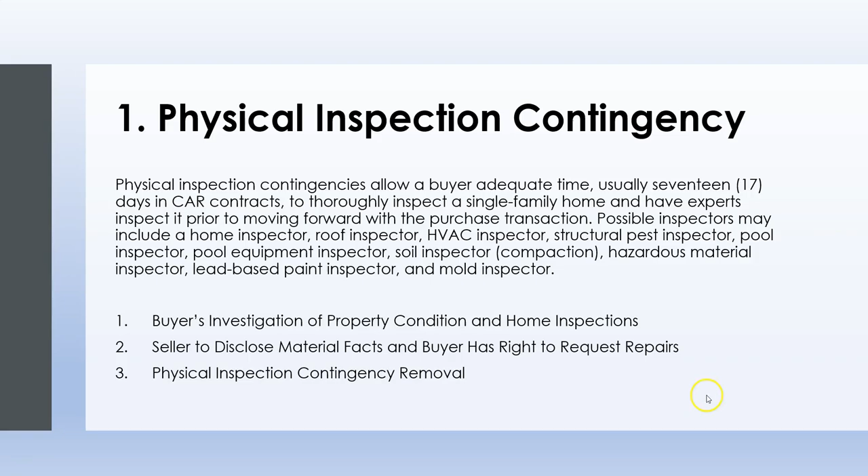And right now we are mostly using active contingency removal, so they would use an actual contingency removal form. So we're going to go into this: construction definitions from the ground up.

Soils report: agent Able notices a crack in a wall and that the doors do not close properly. We cannot say what it's about or what caused it. We can only point out that there is a crack in the wall and that the doors do not close properly, and we should advise them to obtain a soils report because that shows there's something with the soil. We don't know what, but they would want to get an idea of why there's a crack in the wall and that the door is not shutting properly. So soils report, that's what the state likes to ask about.

So that's what we're covering: soil conditions. These are the three soil conditions: expansive, adobe, alkalinity. So these are the three. When you see these three, just know they refer to soil conditions. You don't actually need to know what they are, but that they are soil conditions.

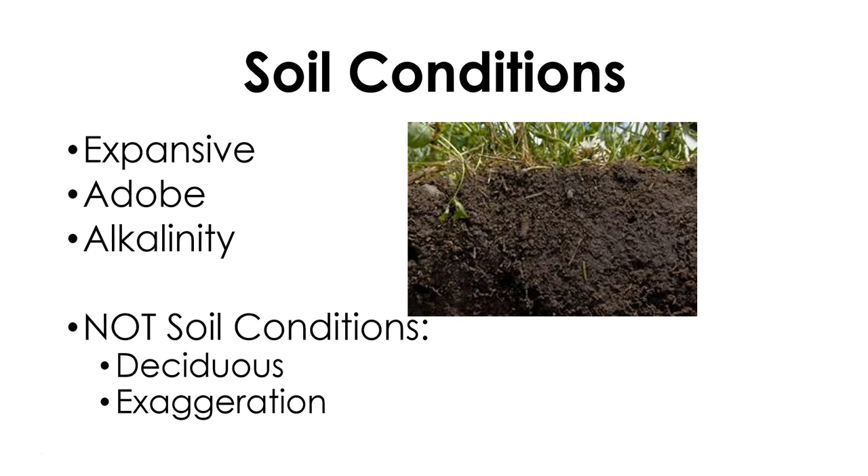Now, if you see deciduous or exaggeration, those are not soil conditions. Deciduous is a type of tree, for instance. So those are not—that's a question that they have out there. You just need to know which ones are soil conditions and which ones are not.

Foundation plan, this is really important. Let me get my pointer here. Let's do a highlighter. Okay, so the footings, these are the things at the bottom of the foundation plan. Now footings can be inside the home as well though, so it doesn't necessarily have to be the exterior of the home. And then you have the sole plate, so that is this part right here, what is the studs and connects to.

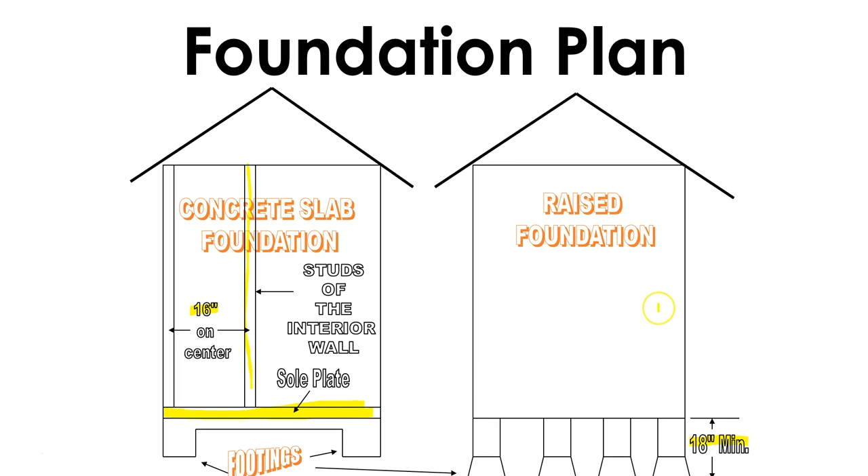And then the studs, these are right here, and they're 16 inches on center. You need to know that—16 inches on center for studs of the interior wall. Now, on the raised foundation, it is an 18-inch minimum. So raised foundations, the crawl space has to be 18-inch minimum, and the footings as well. So that's what you need to know there.

Footing, so when you see footing, it's basically the foundation, so just think of them as synonymous. A footing can be located in the interior of a house, so it doesn't necessarily have to be the exterior of the home. It could be the interior.

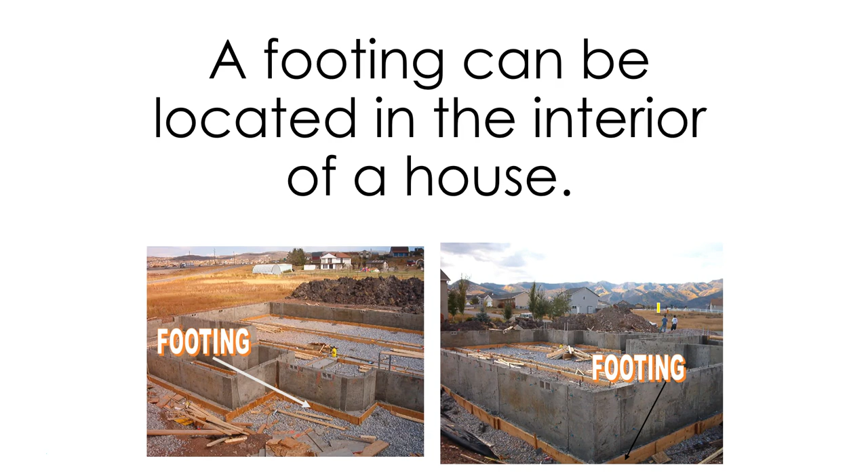Backfill. When they're putting the foundation into the home, they're usually going to excavate some of the soil. What they do is put the soil back where it should be, against the home. That's called backfill. As you can see here, backfill would be in this space right here, and it also makes up for the difference between the home and the ground and soil levels.

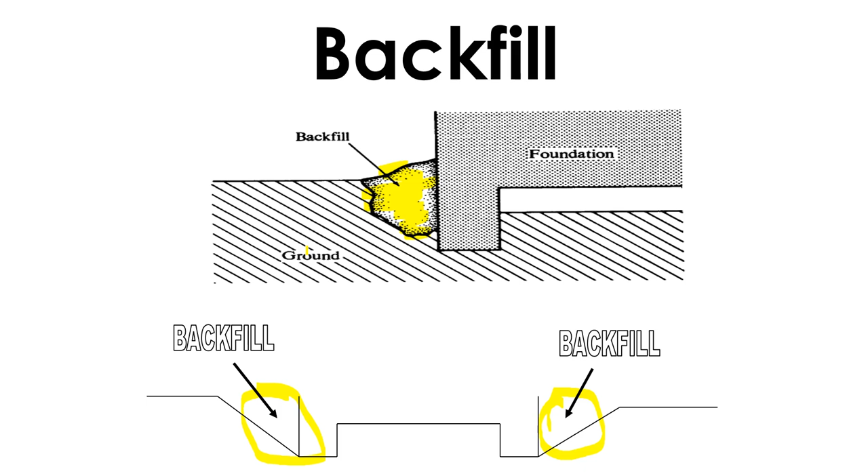Infill. Don't get backfill and infill confused, because infill is an unused area that small commercial developers plan to develop. They look at unused areas, and that's an infill location, and they want to develop that area. So remember, backfill is what we put in next to the foundation, and infill is unused land that small commercial developers plan to develop.

Elevation plan. This shows the exterior view of the building - if you're actually standing and looking at the property, what you're seeing. In new homes, for instance, they'll say there are different elevations to choose from for the same floor plan. It's just what the outside of the house is going to look like - you might have more of a southern look, or a Tuscan or Italian, something like a Mediterranean look. So it's just what it looks like on the outside.

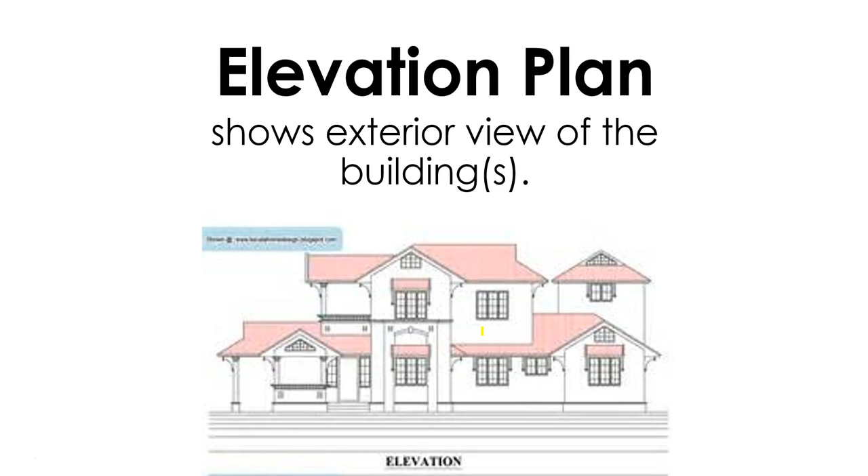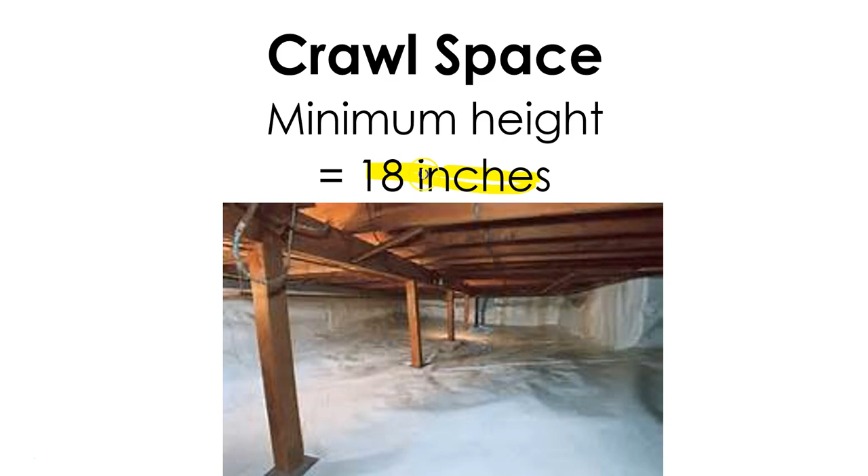Crawl space - remember, minimum height is 18 inches. Studs are 16 inches on center. The crawl space is 18 inches. These are the two numbers you really need to know.

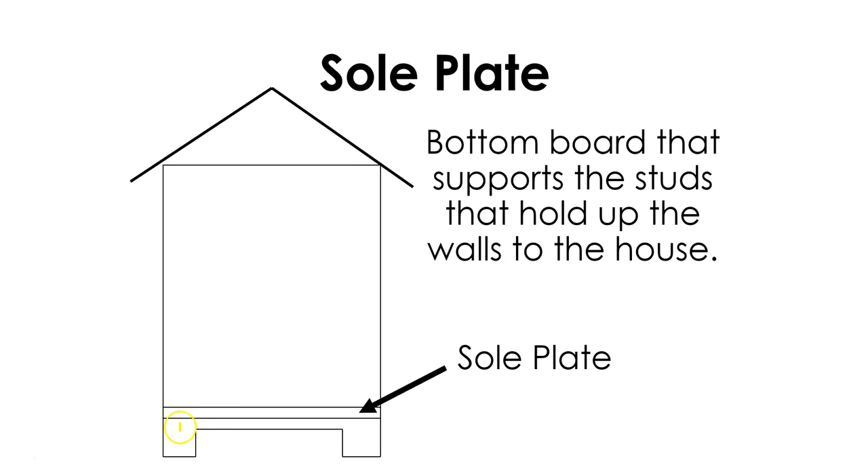Sole plate - it's the bottom board that supports the studs that hold up the walls of the house. Remember where the footing was, where the foundation goes - the sole plate is here, and that holds up the studs, which are here. Remember, 16 inches on center.

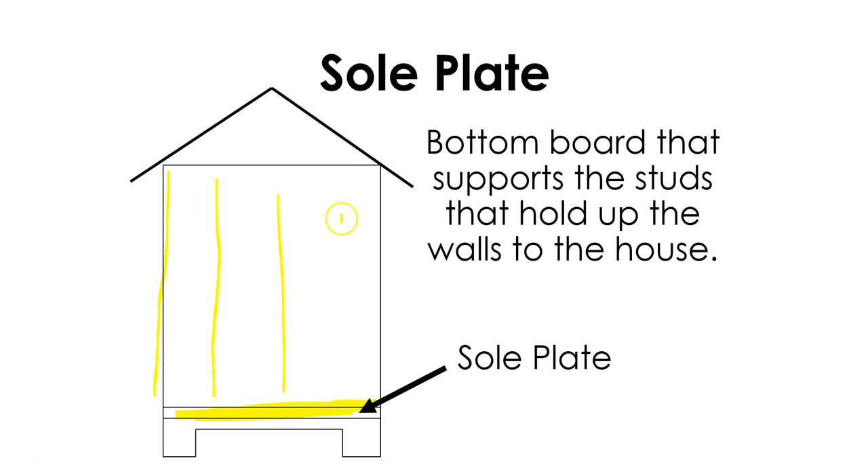Putting it all together - studs, 16 inches on center. They're the boards used to frame a wood frame house. Maximum spacing is 16 inches on center.

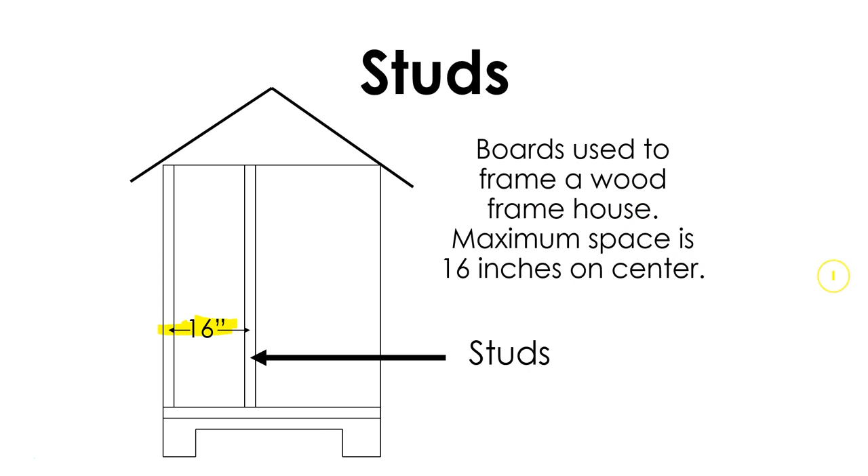One board foot equals 144 cubic inches. You need to know what a board foot is - this is sometimes what people might use to quote lumber, for instance. It's not super common, but we do need to know about it. So 1 board foot equals 144 cubic inches, and this is where you can do the math to figure it out. For instance, a board that is 6 inches by 12 inches by 2 inches is 144 cubic inches and is equal to 1 board foot. So remember, when solving volume...

Let's do the math. We do 6 times 12 times 2, and that equals 144. To make the math easy, you can do 6 times 2 is 12, times 12, which we know is 144. Or you can do 6 times 12, which is 72, times 2 - yeah, that's 144. So that's 1 board foot.

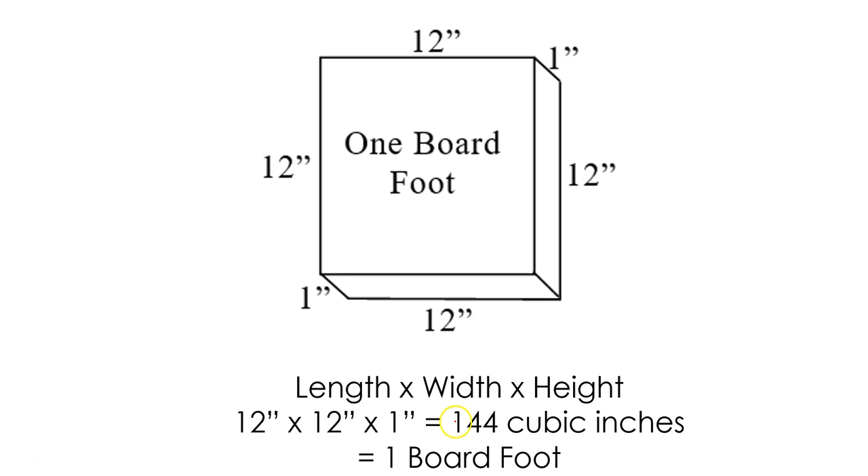Now let's apply this. For instance, if it's 12 inches by 1 inch by 12 inches, that equals 144 cubic inches, which is 1 board foot. So 12 by 12 by 1. Remember, we have to keep track though if it's inches or feet.

So for instance, here's another one. If it was 12 inches by 2 inches by 6 inches, we have 12 inches by 6 inches by 2 inches equals 144 cubic inches. And we know 144 cubic inches is 1 board foot.

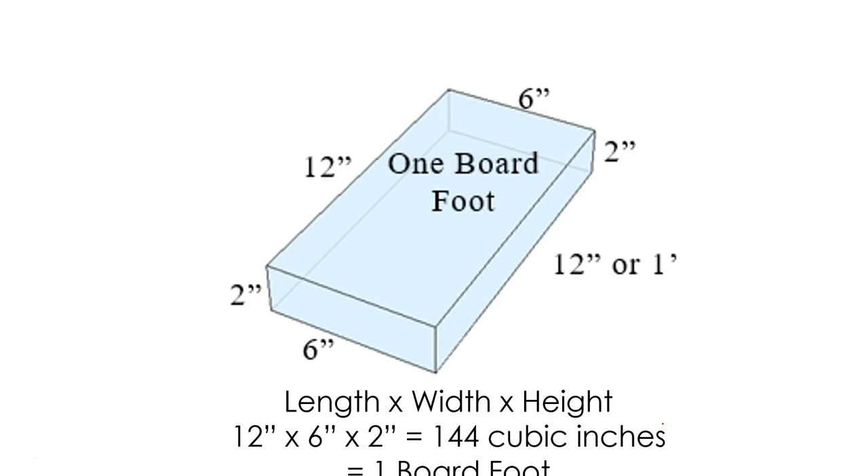Now here's where it gets a little fun, because this one is in feet. So we have 12 feet by 12 inches by 2 inches. What we'd do is find out how many cubic inches it is, divide it by 144 since that's 1 board foot, and we'd know it's 24 board feet. So just keep that in mind. We do the math just like we did here. It's 144 cubic inches, so if we divide 144 by 144, we get 1 board foot.

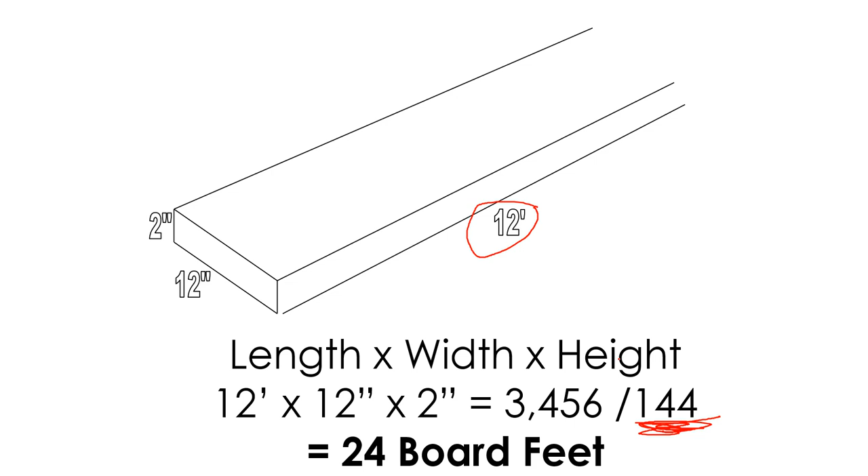However, this one we have 3,456 cubic inches divided by 144 cubic inches, and we get 24 board feet. So some simple math calculations, but it's good to know how to do it.

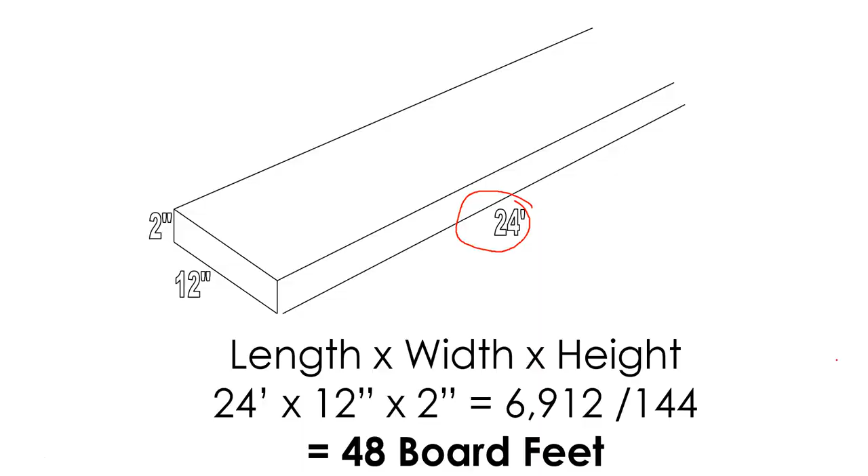We'll apply it one more time. So if it's 24 feet by 12 inches by 2 inches, then we have 6912 divided by 144, so we get 48 board feet. These are important to know to be able to do the calculation. So when you think of board feet, just think of 144 cubic inches, because we're dealing with volume: length times width times height.

Okay, bearing wall. A bearing wall usually remains intact during remodeling, can be an archway, and usually contains stronger structural members. Bearing walls are really important—they keep the house up, and they usually remain because touching them is a pain for structural purposes, but also for permits. So it's really important to remember about the bearing wall. That's really all you got to know for state exam purposes.

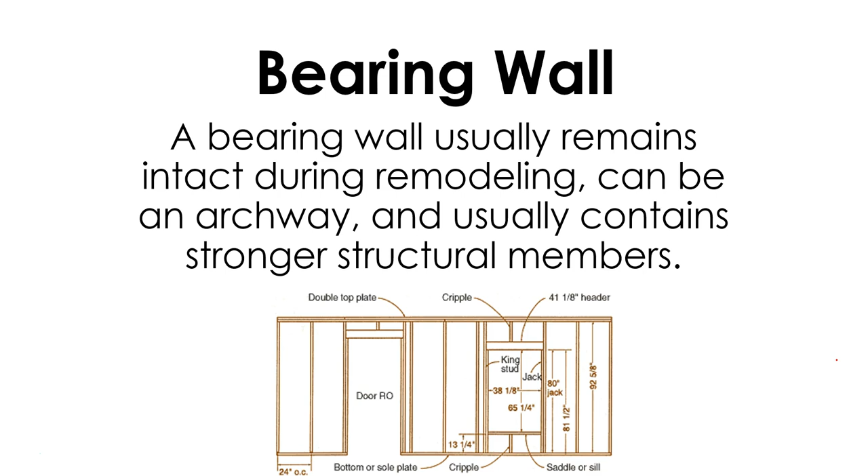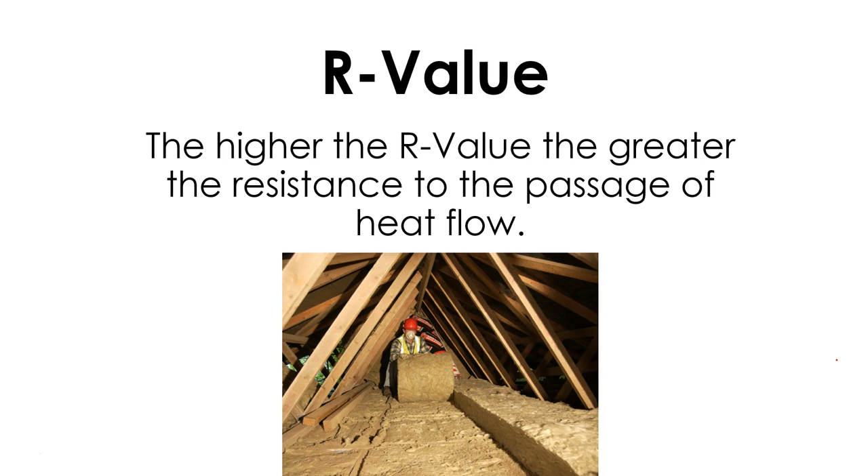So let's move on, R value. The higher the R value, the greater the resistance to the passage of heat flow. So if you have a higher R value on your insulation, you're going to have greater resistance to heat flow—so it's better insulation. Just remember that: higher the R value, the better, because it has greater resistance to the passage of heat flow.

EER, energy efficiency ratio. The higher the ratio, the better the rating. So we want to have energy efficiency, and the higher the ratio, the better it is.

Joist. So we've talked about floor, sole plate, footings, and the studs that are 16 inches on center, but what about the joists? The joists are the parallel wooden members used to support floor and ceiling loads. So it can be in the floor or also in the ceiling—it's important to know the joist could be in the ceiling.

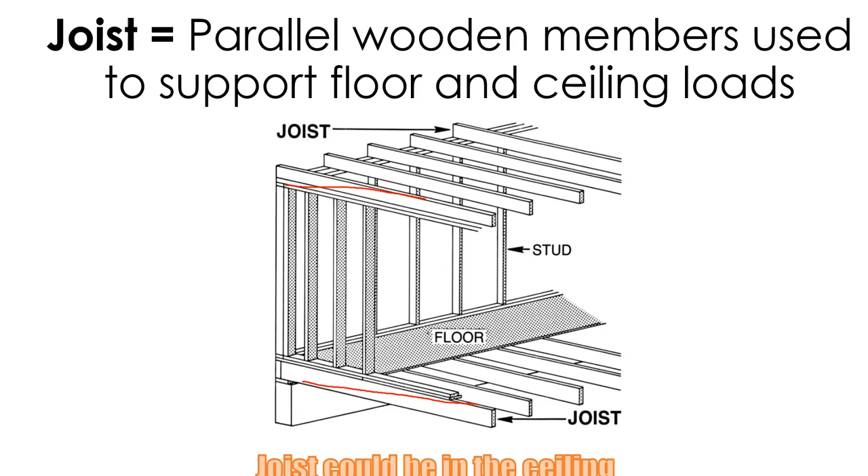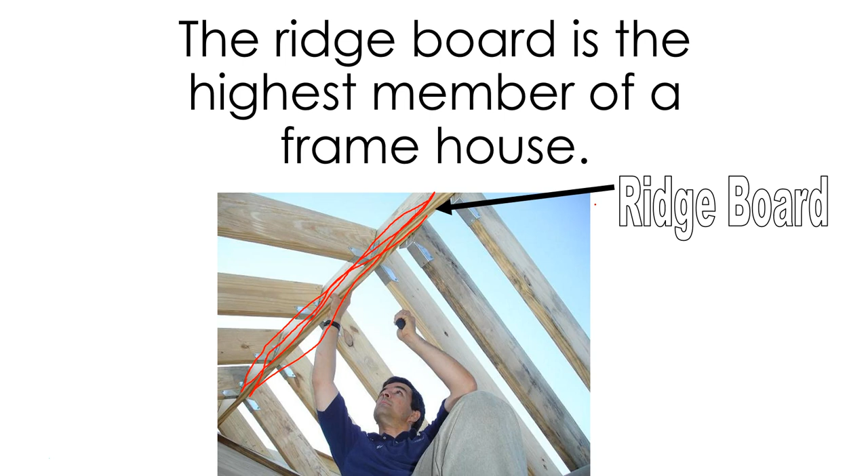The ridge board—when we're talking about the roof of the house—is the highest member of the frame house. Right here. Trusses usually connect to it, but just know: ridge board, the highest member of a frame house. And no, we usually don't look that pretty working on it.

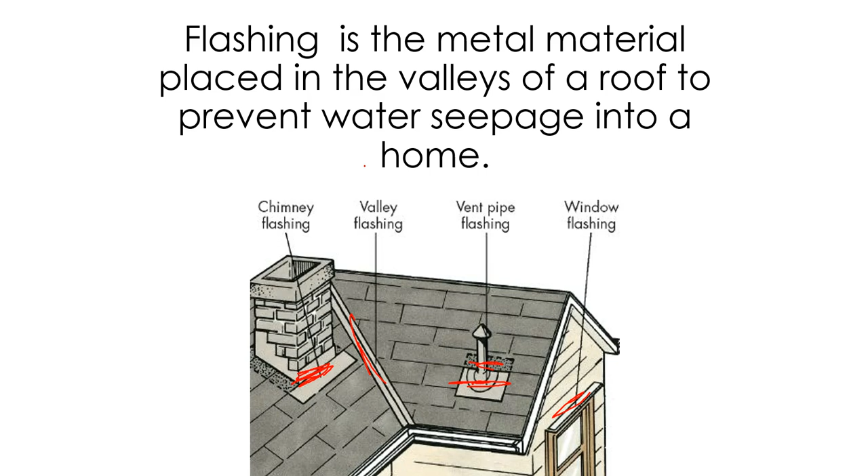Flashing is the metal material placed in the valleys of a roof to prevent water seepage into a home. So see where the flashing is here—chimney flashing, valley flashing, window flashing, vent pipe flashing—just to make sure water does not seep into the home. So it's to protect it, it's the metal material. If you see a roof with metal material, that is the flashing, and it should have flashing. Home inspectors will comment if the flashing is not in great condition too.

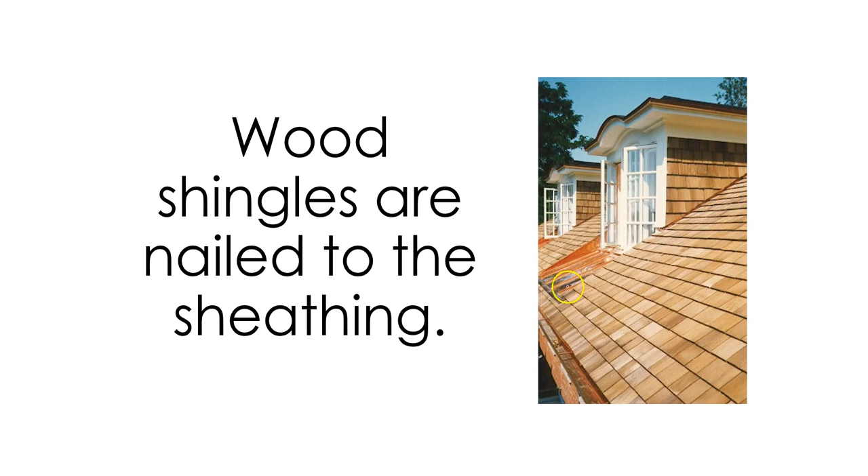Wood shingles are nailed to the sheathing. So you just need to know that—if there's wood shingles or a wood shake roof, for instance, they're nailed to the sheathing. That's all you gotta know.

So we're going to move on to appraisal contingency. That's it for the physical inspection contingency. If you have questions, please reach out.